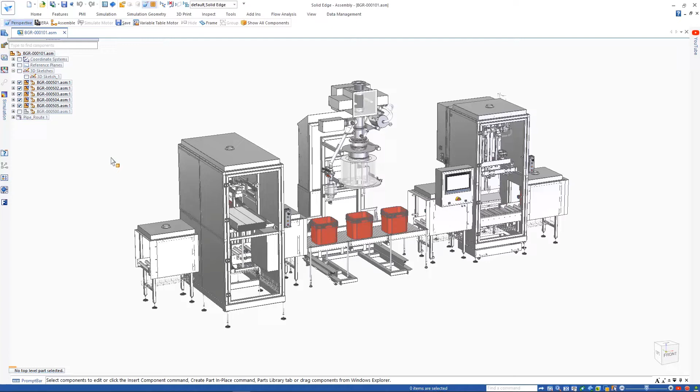Accelerate the speed of simulation studies with automated processes that validate design performance. Solid Edge simulation capabilities provide design engineers with powerful tools to help digitally validate their designs and build better products in less time by front-loading the simulation process.

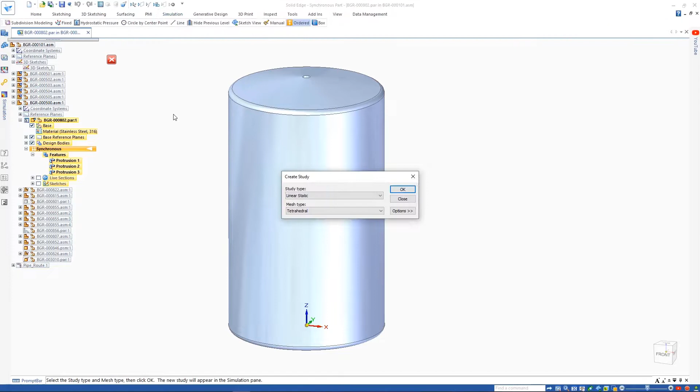Solid Edge simulation can calculate hydrostatic pressure loads in a linear static or coupled study. This can be used to determine the maximum and minimum pressure that is exerted by a fluid from a given point due to gravity. Running such a study on this tank for a dosing assembly line, we simply need to

select the faces the load will be applied to, define a height for the fluid in the tank, and define the material density. In this case, we'll also apply a fixed boundary condition to the bottom of the tank, then mesh and solve the simulation.

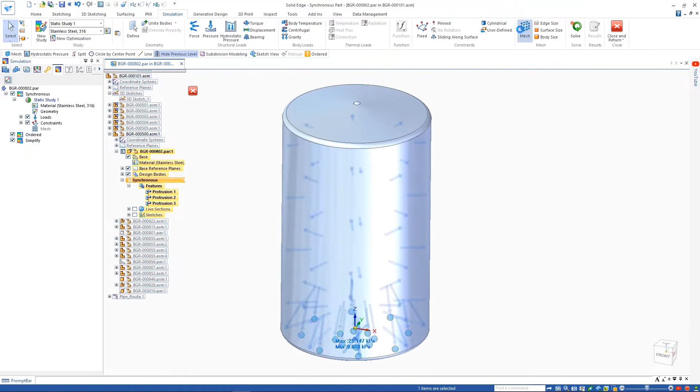Here we have a new body mesh option, a new Siemens mesh technology that simplifies and improves the tetrahedral mesh for complex parts with intricate bodies and automatically cleans up small faces and edges.

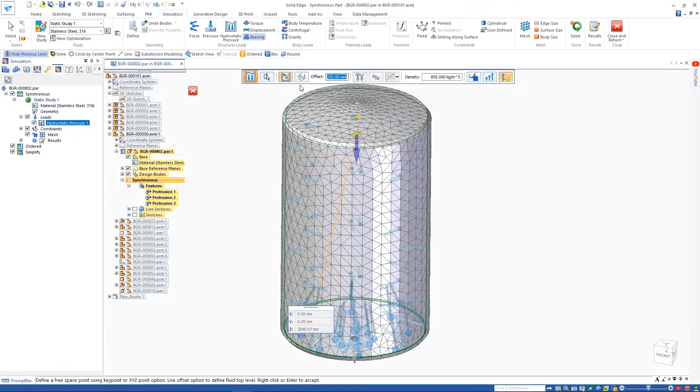Viewing the results, we can see the areas of higher stress at the bottom of the tank and lower stress at the top. The maximum stress value is nowhere near the yield stress, so the thickness of our tank is more than adequate for the job.

Adjusting the level of the material in the tank is as simple as editing the hydrostatic pressure load and selecting a new reference point, or simply adjusting the offset value. Solving the study again allows us to see the differences in pressure that the lower fluid level has on the tank. Next, we'll look at some of the enhancements to simulation studies of structural frame models.

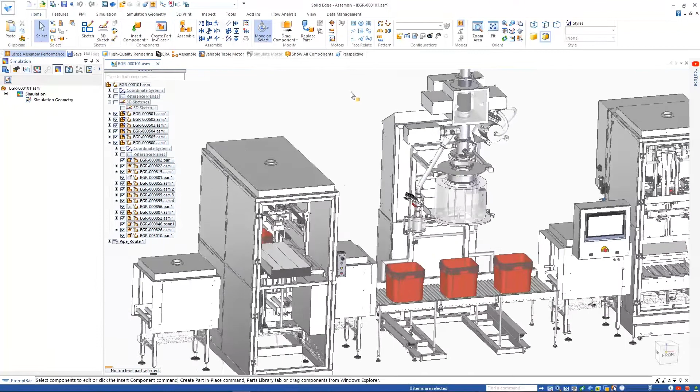As we define this study, we can see that automatic link creation now considers all cases where rigid links need to be created and only creates those needed for the study. We can adjust the connector option to specify a maximum rigid link length to automatically create links, or, as we'll do here, we can use the automatic link command, which enables the model to be set up far more quickly.

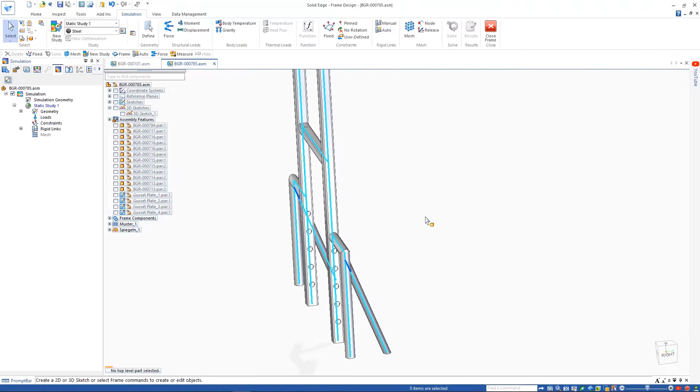We'll go ahead and apply a fixed constraint to the bottom of the structural frame and define a force to the top two horizontal beams, then solve the study to see the results. Another new feature for Solid Edge simulation is the ability to view beam von Mises stress plots for frame models. Factor of safety plots have been enhanced and are now based on the von Mises stress, producing far more accurate results than the maximum combined stress results that were used previously.

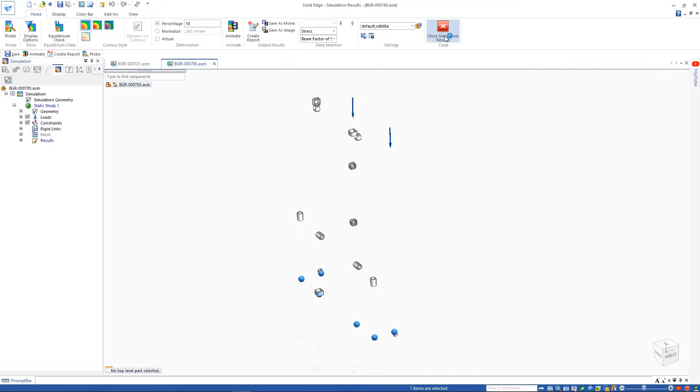Switching back to the main assembly, we can see there are some pins holding the dosing mechanism in place. Opening one reveals that it's a mesh body. Solid Edge simulation can now validate mesh models resulting from a 3D scan or generative study. Here we can see the results of an existing linear static study.

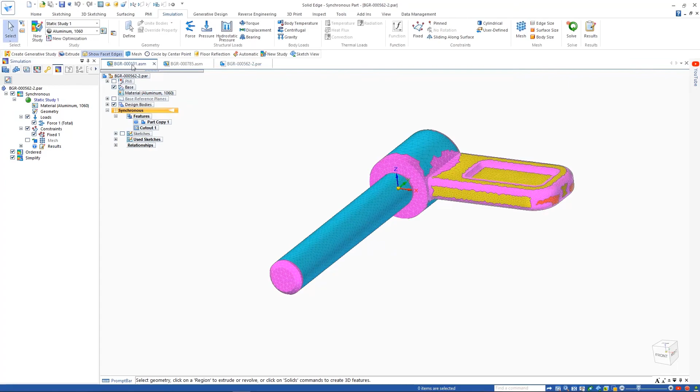Being able to create the simulation mesh right on top of an existing mesh body truly sets Solid Edge apart. There's no reverse engineering or any other complex procedure required. Simulation-driven design helps designers get immediate feedback on design performance by embedding simulation into the CAD environment and designers' processes. Simulation display performance optimizes load times for results data, making Solid Edge simulation faster than ever before.